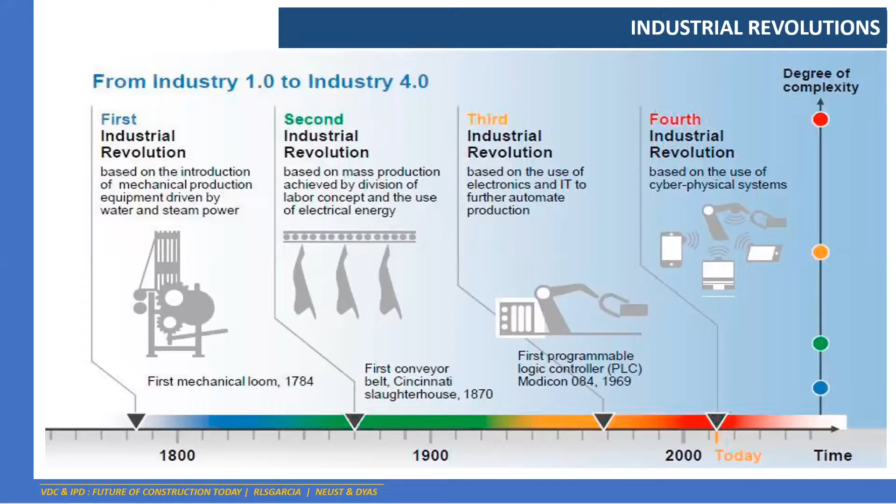Okay, so let's start. The industrial revolutions. Okay, sorry, I was distracted for a bit. Industrial revolutions, from Industry 1.0 to Industry 4.0.

So the first industrial revolution, as we all know, is when the first mechanical loom was invented or introduced, in 1784. It is based on the introduction of mechanical production and equipment driven by steam, or basically heated water.

Then after almost 100 years, the second industrial revolution takes effect. This one is based on mass production achieved by the division of labor concept and the use of electrical energy, so the first conveyor belts. If you notice, the main concept of having these conveyor belts is to strategize the workflow.

Basically more on manufacturing, then later on you will realize there's a connection: the manufacturing processes are being introduced now to be applied in construction using this digitalization.

Okay, and to proceed, we have the third industrial revolution, which is based on the use of electronics and IT to further automate production. This kicks in around 1969, so it's around the 1970s, when the first computers were introduced, and information technology gains traction.

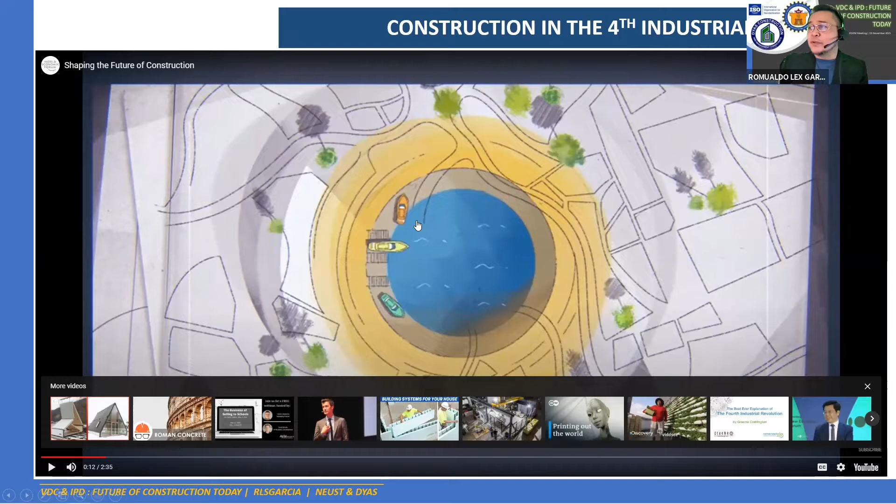So let's take a look at this one. To address these challenges in infrastructure and urban development... could anyone confirm if the audio is audible?

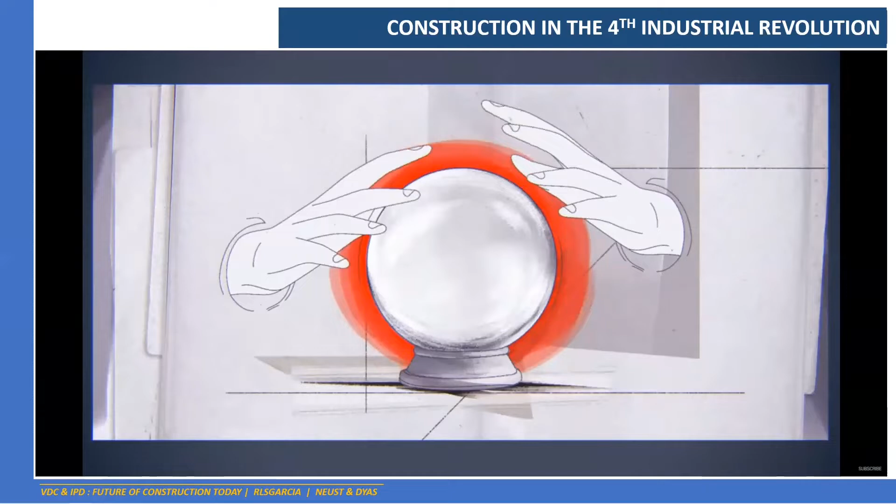Industry, the World Economic Forum established the Shaping the Future of Construction project. But what will the future of the industry look like? How best to prepare for it? The World Economic Forum, in collaboration with the Boston Consulting Group and together with global infrastructure and urban development leaders, developed 3 scenarios of the infrastructure and urban development industry's future.

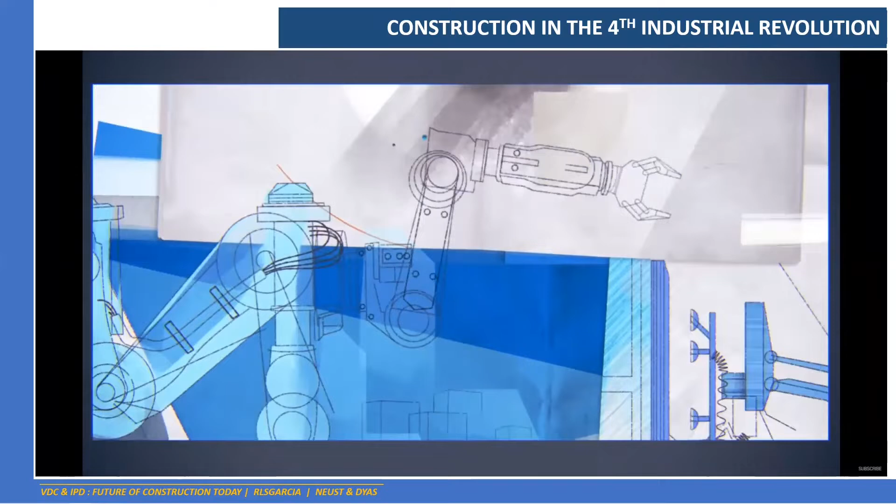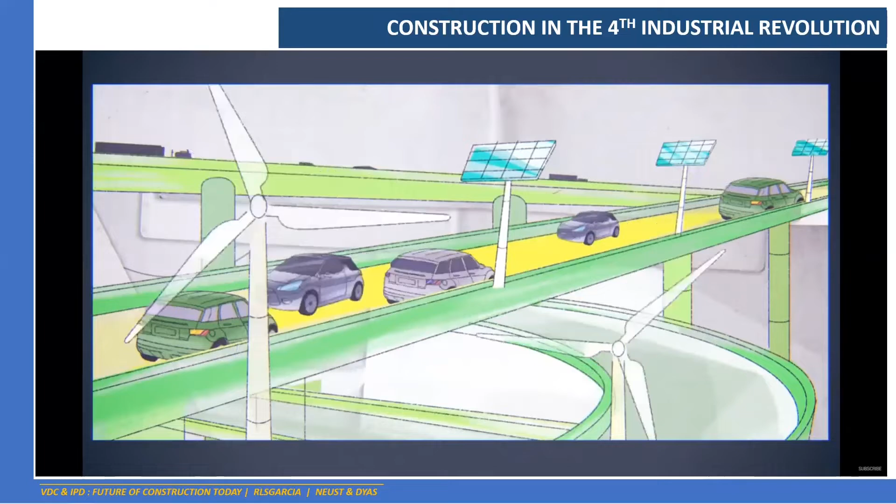One is a world in which virtual reality touches all aspects of life and intelligent systems and robots run the construction industry. Another future could be a factory-dominated society in which prefabrication and modularization are used to create cost-efficient building structures. Or a third scenario: the world will face severe climate change and depleted natural resources, which urge the infrastructure and urban development industry to use earth-friendly construction methods and sustainable materials to rebuild nature.

Current business models, strategies and capabilities of players in the infrastructure and urban development industry will not be sufficient for any of these future worlds. But there are 6 no-regret moves all infrastructure and urban development companies can take to prepare.

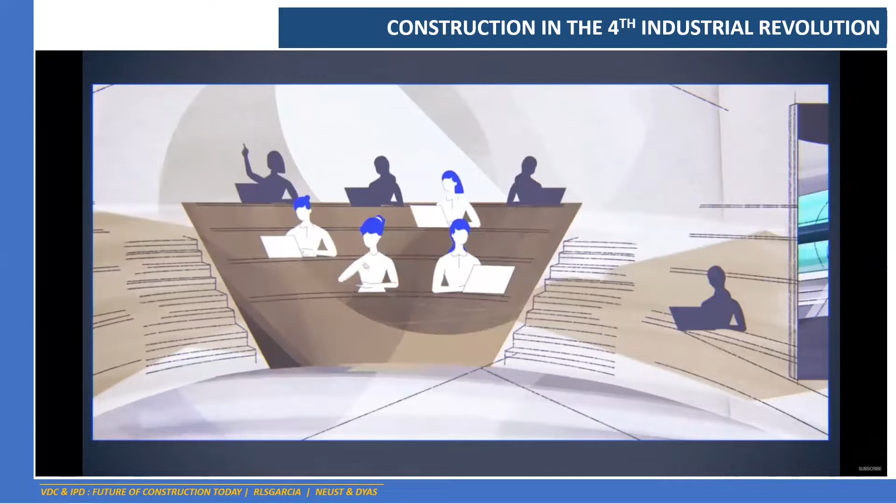First, they must attract new talent and build up the required skills. Widening the sourcing of talent and improving the industry's image can help. The companies should also provide more modern workplaces and opportunities for learning and development.

Second, infrastructure and urban development companies need to enable change management and adaptiveness. This requires agile working methods and flexible organizations. Third, furthermore, they need to implement digital models and data usage throughout their processes.

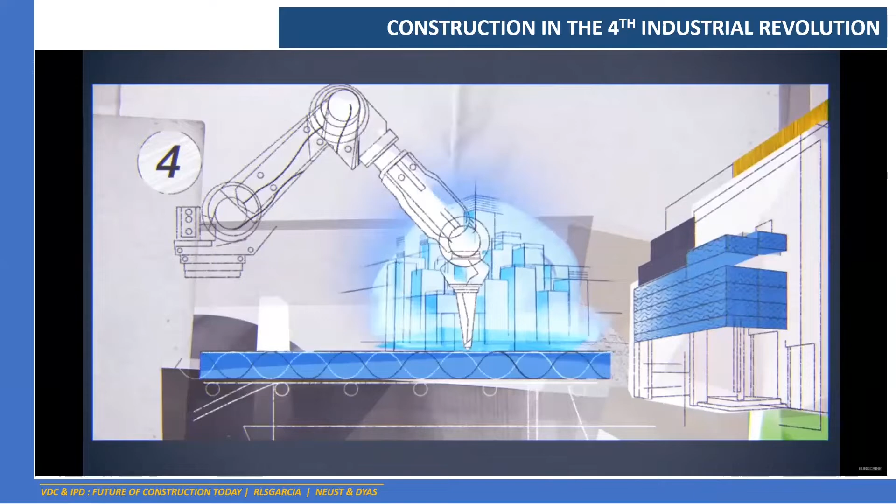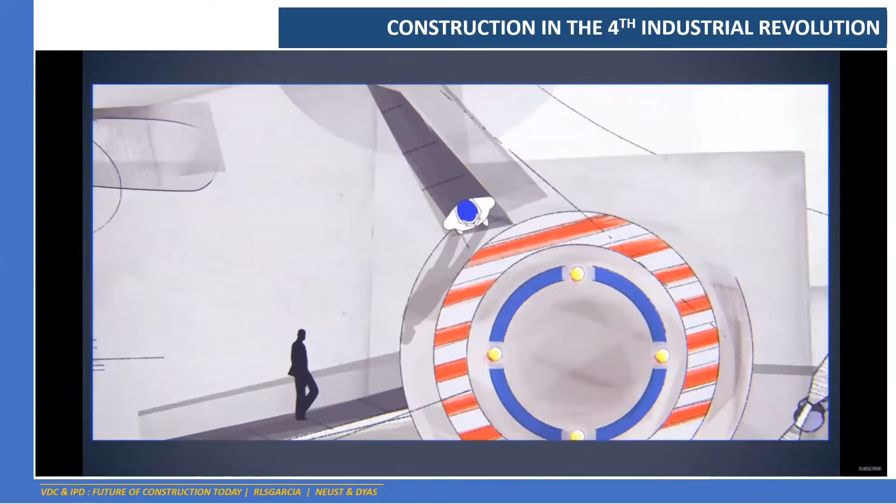Fourth, they must also adopt innovative technologies at scale. It's important to innovate in new ways and integrate new technologies. Fifth, infrastructure and urban development companies need to increase integration and collaboration across the value chain. Sixth, companies must also constantly identify the most promising products and market segments while embracing new businesses.

All right, so this is basically the video prepared by World Economic Forum. A lot of those information, graphs, or tables that I'm going to present later on are coming from the World Economic Forum. They are basically one of the drivers during the fourth industrial revolution to jumpstart what is needed to be prepared.

As we are always saying, unlike other industries, the engineering and construction sector is definitely behind. It has a slow adoption rate compared to other industries such as manufacturing to adopt these new technologies, and has certainly never undergone a major transformation. As a result, productivity has stagnated for over the last 40 years.

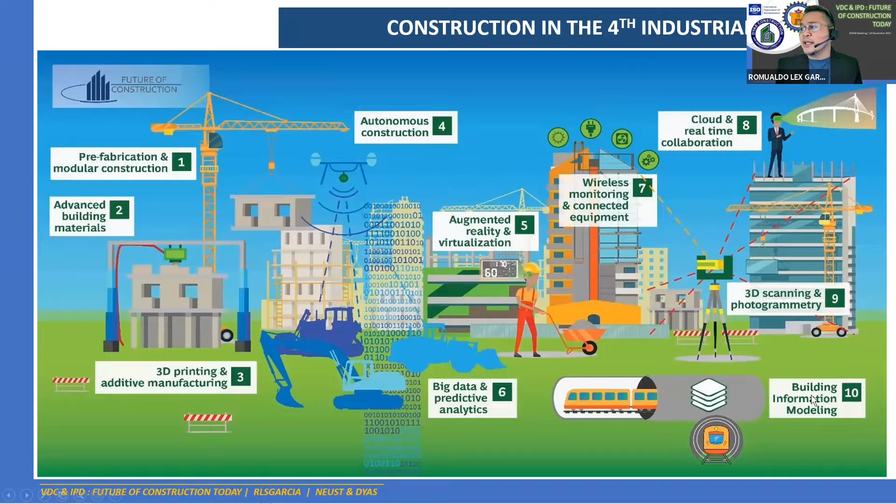Two pieces of those is going to be a distribution line for a major gas or oil company. So for us to test if the connections are good, if the elevations and proper installations are correct, we have utilized photogrammetry, which is photographs and dots post-processed into a 3D model. And lastly, but not least, of course, BIM, the building information modeling. More on this later, so we'll skip this slide.

We have been mentioning the World Economic Forum, and this is one of their main contributors, the Boston Consulting Group. From the white paper they have shared, there are many digital technologies that can be applied along the engineering and construction value chain, from planning, design and engineering, construction, until operations. Some of these are the examples already mentioned.

Big data analytics, simulation, virtual reality using HoloLens or AR, augmented reality, and mobile interfaces. We have AR glasses connected to a tab or our phones, so we can do our 3D review even using just a tab. Even on site, as long as you have internet connection, you can do that. So that's the main concept.

And of course, building information modeling stored in the cloud. And you have ubiquitous tracking, manufacturing, 3D scanning, etc.

With these technology advancements, it is constantly being revolutionized and developed, and these are applicable from the conception, from concept design to detailed design, to the actual construction phase, until the as-built phase and the handover, even to FM, which we call the facility management stage or the built asset.

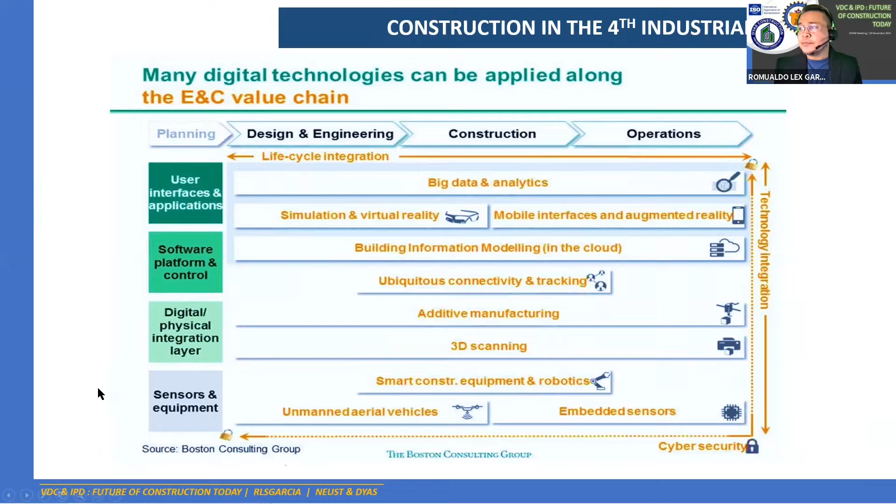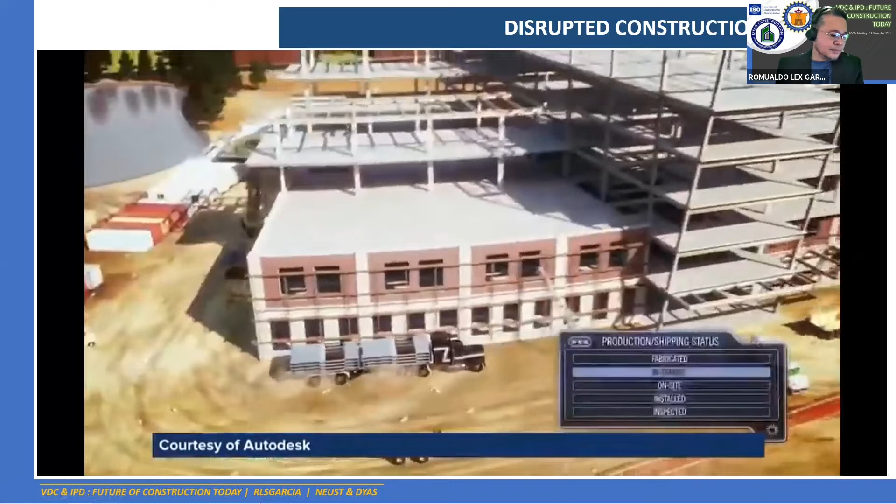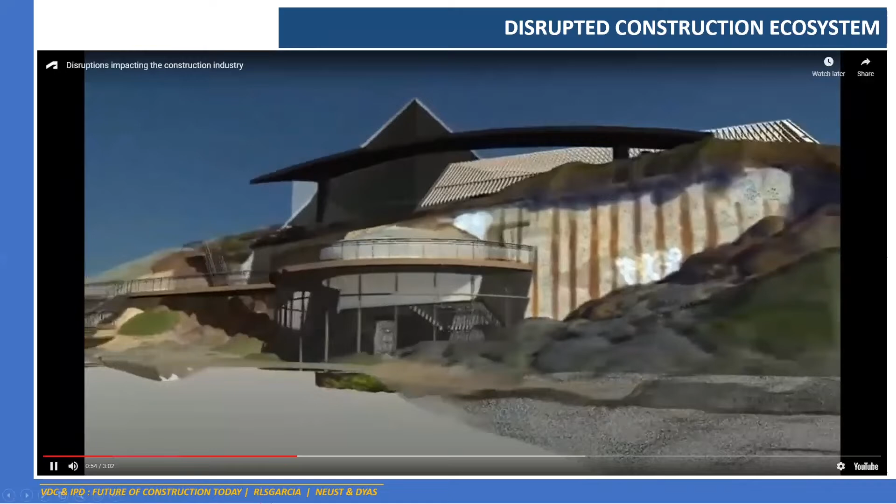The construction industry is changing. The arrival of digital technology is radically altering the way buildings are designed and created. Building information modelling combines innovative technology with more effective business practices, transforming the construction process using intelligent 3D models. It's the first step towards the future of making things, and Autodesk is leading the way. This is the big collision of the digital and the physical worlds - the ability to very easily, simply and cheaply capture reality and bring that into a digital environment, to then work with that digital environment through the use of things like gaming engines to simulate and come up with the best outcome, and then to take that back into the real world through things like augmented technology. Autodesk software de-risks the construction process by outlining and solving challenges pre-build, designing out error and therefore waste.

Hill was an early adopter of BIM. Here, a steep incline was factored in at the planning stage. With BIM, you can spin buildings around, you can turn them upside down, and you can then understand in ways we never could how buildings will be going together. And in an increasingly globalised industry, BIM technology allows companies to become more competitive, putting all the relevant build information in one place, liberating site managers. It allows us to bring our office out onto site with us, so it frees up a lot more of our time. You know, years ago we'd spend 90% of our time out on site.

10 years ago that started reducing until we're probably spending 30% of our time out on site. This gives us back a fair chunk of that back out on site again. You've got a lot more control of what's going on, you know what's going on more day to day, and you've got a lot more control over the details that we've been put in.

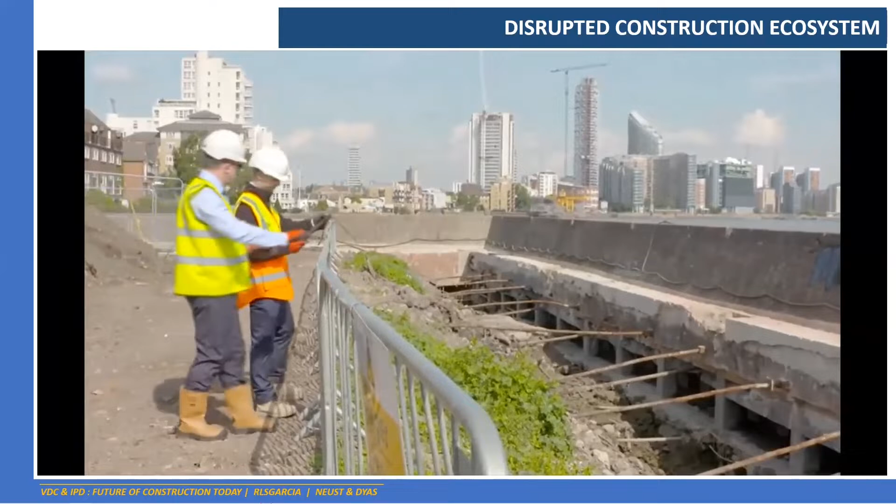Autodesk is harnessing two major new arrivals in the field: the cloud, which is putting project information and application functionality into the hands of the construction workforce, supporting them with vast amounts of computing power, and generative design, the use of algorithms to accelerate the design of projects.

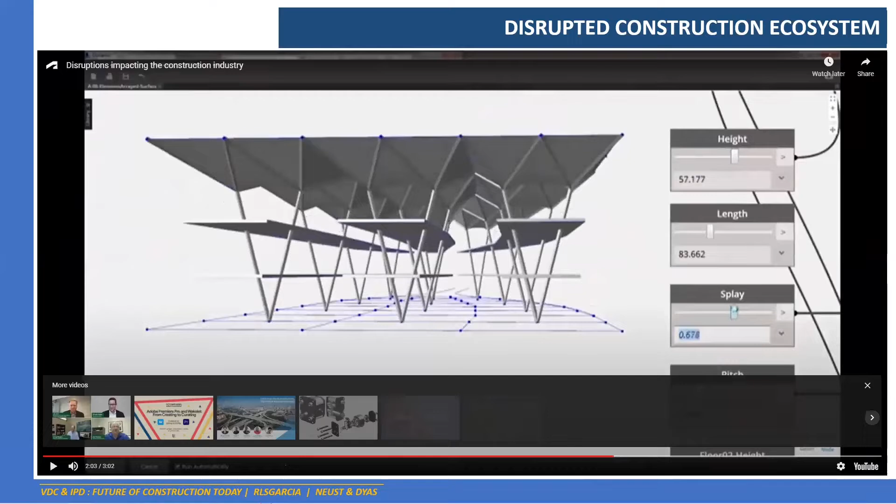Okay, so we're about to transition to the next part of the lecture, which is construction industry as a disrupted ecosystem.

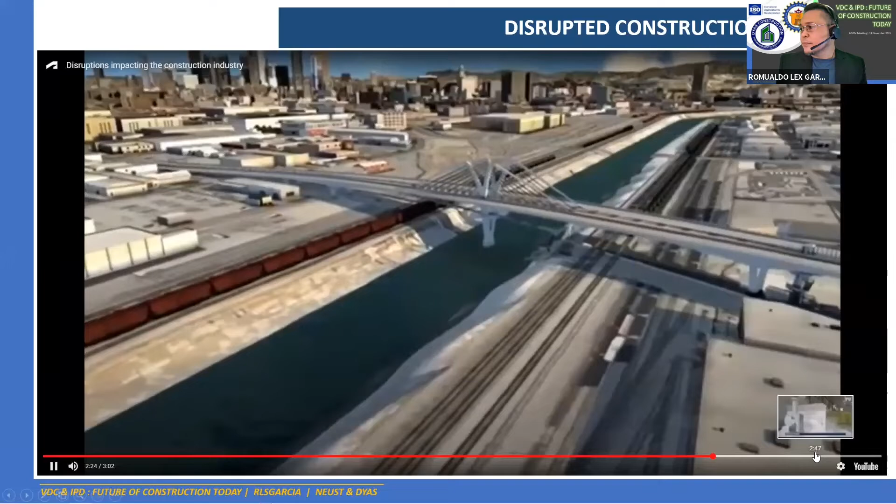Computing power essentially pursues the best possible outcome because you have access to huge numbers of resources. And robotic manufacturing holds the promise of radically shortening the distance between a design and...

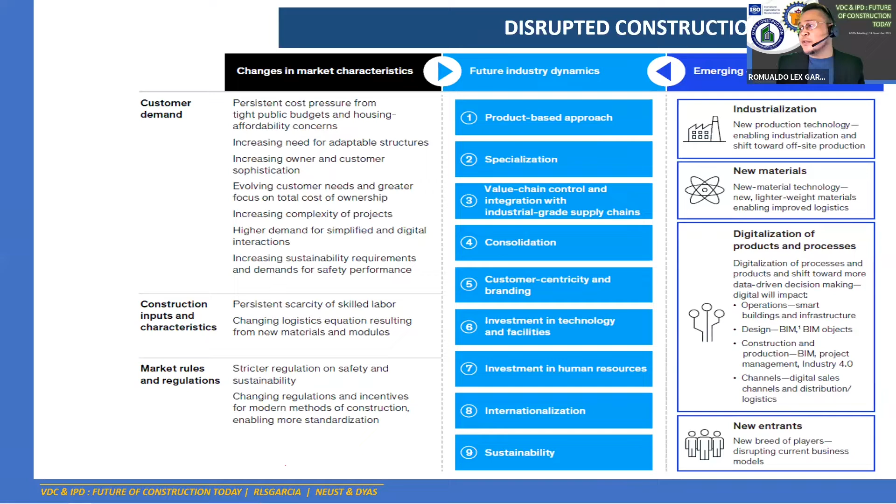Again, these are the sources of the construction disruptions. This is from the paper by McKinsey and Company. They have the rising customer sophistication, scarcity of labor, safety and sustainability, industrialization. These are the sources we had explained earlier, the new sources of disruptions in the industry.

Also, because of new technologies and persistent scarcity of skilled labor and changing logistics equation, skilled labor shortages have become a major issue in several markets.

And of course, those who don't transfer their knowledge will eventually retire. So that is one of the practices we are trying to do, transfer of knowledge from the generation already practicing it to the younger ones. Once they get a better grasp of it and are able to innovate, we have a huge chance of being successful in the next industrial revolution with these new ideas. It's still rooting there. The older staff knows a lot, but if it is not transferred within an organization, it is really detrimental to the fall of that company.

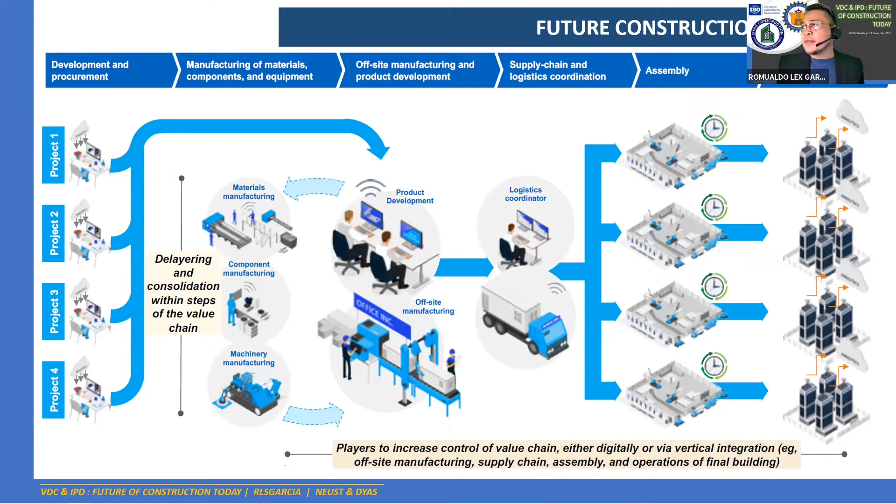Alright, so everything good so far? We're already midway with our presentation. So let me introduce the virtual design and construction processes. I hope that information is clear. We're just emphasizing there's really a need to digitalize these processes and streamline them using the available technology and innovations that we have.

Now let me reintroduce BIM to you guys. So what is BIM? It is Building Information Modeling. It is an intelligent 3D model base. Intelligence, take note, it is not only for picture, not only for visual, but you have a lot of built-in information within those objects in your 3D model, or elements, with corresponding attributes and parameters. These are model-based processes that give key engineering and construction professionals, or the AEC as we call it, the insight and tools to more efficiently plan, design, construct, and manage buildings and infrastructure.

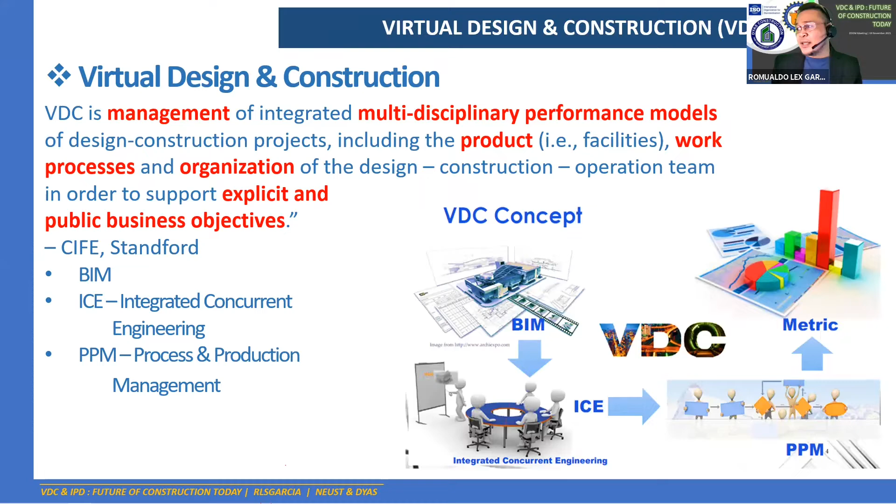Basically, the attendees of the ICE meeting are the major stakeholders or major decision makers—the PM, the design manager, the discipline leads who can say yes we will move, or no we can't. Because the main purpose again of the meeting is to resolve the issue. Okay, we sit in, take a look at the model, identify the issues we're facing, and right there and then we should be able to resolve them. A lot of companies are doing that, especially the big companies doing huge projects.

So this one, if you're able to see a document from BCA, the Building and Construction Authority in Singapore, this is from the VDC guide actually. It simply shows here that we have project goals, and for us to be more efficient, we will utilize ICE, we will utilize BIM, and we will utilize PPM, or the Process and Production Management. So these are the targets from the Singapore VDC guide. We have BIM—it could be the product, the content, and the quality are really checked. These are the information embedded in each model to fulfill that specific target.

We will not go into detail on this one, but you will definitely have in the actual project the level of detail. This is basically one we are trying to resolve or have inside our models.

Then also the ecosystem, which includes the stakeholders, the environment, the network, and process optimization. Normally, when we do VDC trainings, it's more about setting our mindset that we have technologies available, but we also have our traditional processes. Now, if you as the leader of that company or organization, what can you do to streamline this? What can you do to utilize available technology in the market? A lot of companies are doing R&D on it, and you can simply adapt.

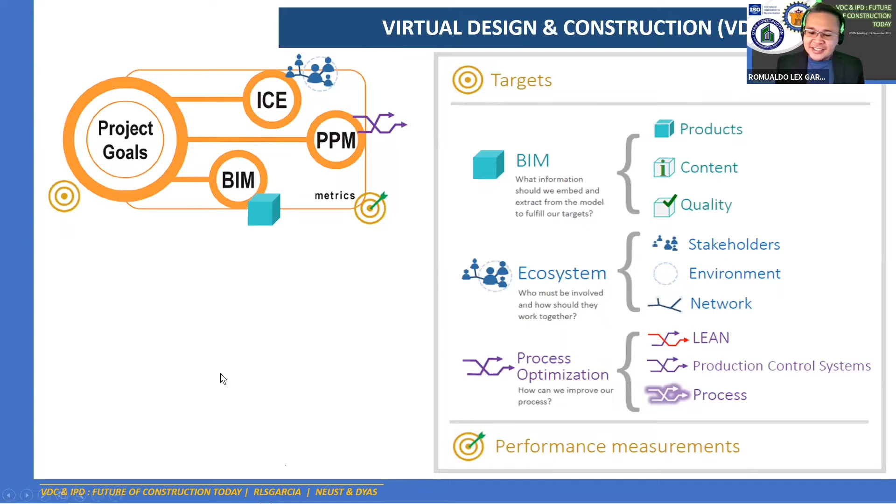Isn't it amazing? Okay, I think we're going to transition to the last part of our presentation.

I'm going to show some examples of BIM and VDC applications in all construction project phases. We do have applications from conception or basic design, to detailed design, to as-built construction, until handover and operations, or FM, facilities management.

One of these BIM VDC applications is, of course, reality capture. You have your camera, you can have smooth communication, comparison, etc. Basically you have a camera and you're utilizing it to capture your actual project. This is very useful for starting renovation projects or alteration projects, or for as-built documentation.

I think this is a video, yeah, one example of laser scanning and scan to BIM. You scan using reality capture equipment and eventually post-process it into a 3D model that you can utilize also in your 3D workflow.

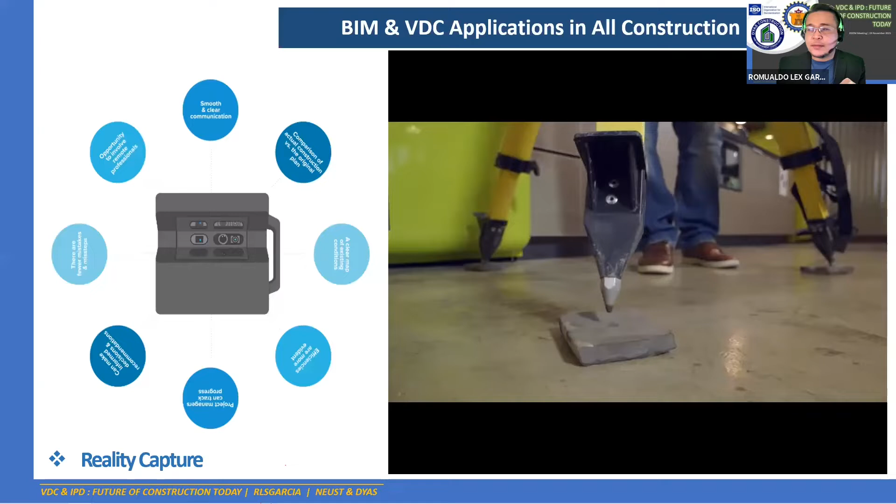The device basically shoots the laser at the target and then captures the data in return. It scans a vertical line and then pivots a small degree and scans the next vertical points. The points are registered, and we can register the points to a survey grid.

I'm going to fast track this one because we still have the IPD to cover, and I want to cover that because it's quite unique and still new even in the Singapore context. So I will fast forward this.

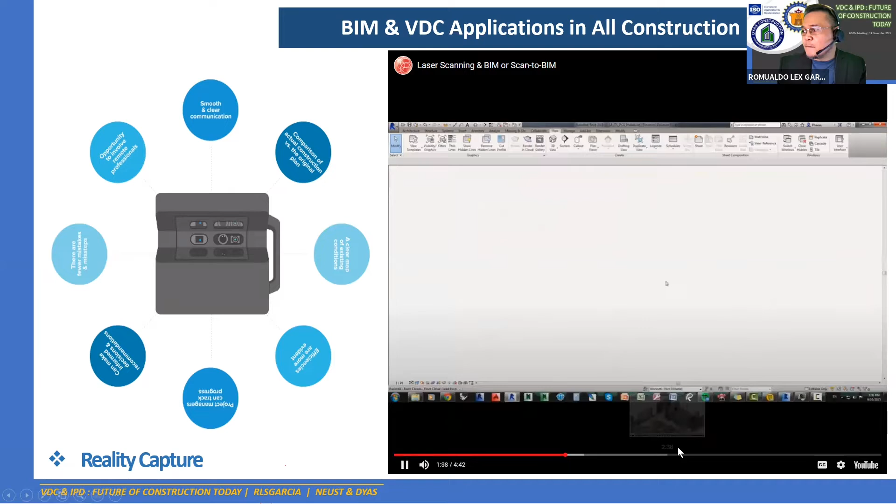3D BIM models that we can use for floor plan drawings, elevation drawings. We can cut sections through the point cloud, so we can actually generate traditional documents very, very quickly, and know their actual representation of the actual space.

From a design perspective, we can design a new system inside that point cloud. So we can put a new ceiling into a space, maybe it's a retail space. We can put in new shop fronts and see what they look like in an accurate survey. Then we can figure out, okay, if we demolish these rooms, we can refit them this way, so we know the new systems would fit inside the old system.

We can get very, very detailed, capture the survey information, and then a couple of weeks later somebody says, actually we need a measurement for the internal wall system. We don't have to go back to site and survey again, we've already got all the points, so we can just go back and remeasure the scan for that. It's essentially a very, very powerful survey tool.

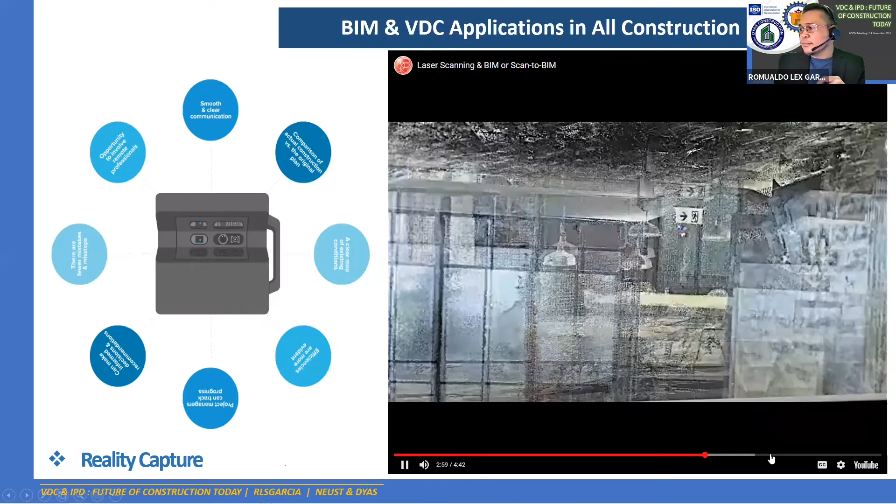But you may want to use the data for something else, like facility management. So you've got your building and you don't have a BIM system. You could actually survey the facility, capture all the as-built information of a space that they already own or that they're planning to purchase or invest in. That's where it gets very, very interesting. It's clear that the 3D point cloud data produced by high definition scanning will save time.

Okay, so this is our HD laser scanning. We have a lot of that in, I think even the Philippines, we're applying that. We do have several companies who offer rental so that we can apply the reality capture or the scanning.

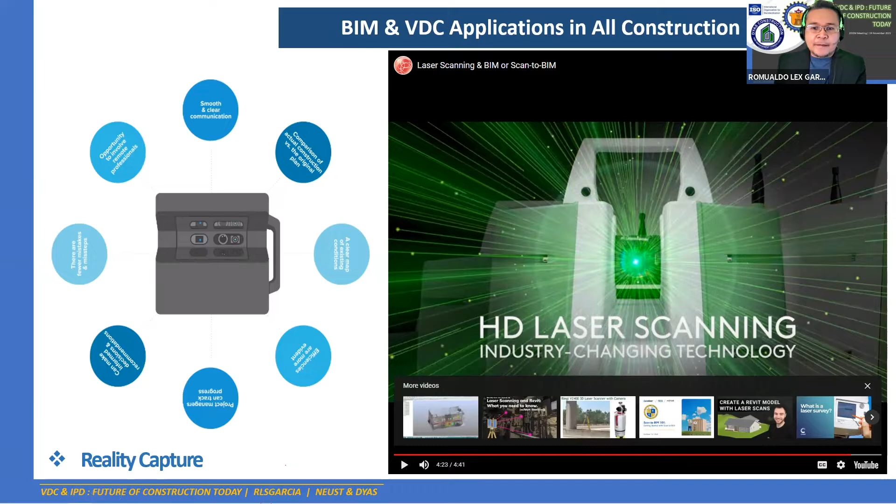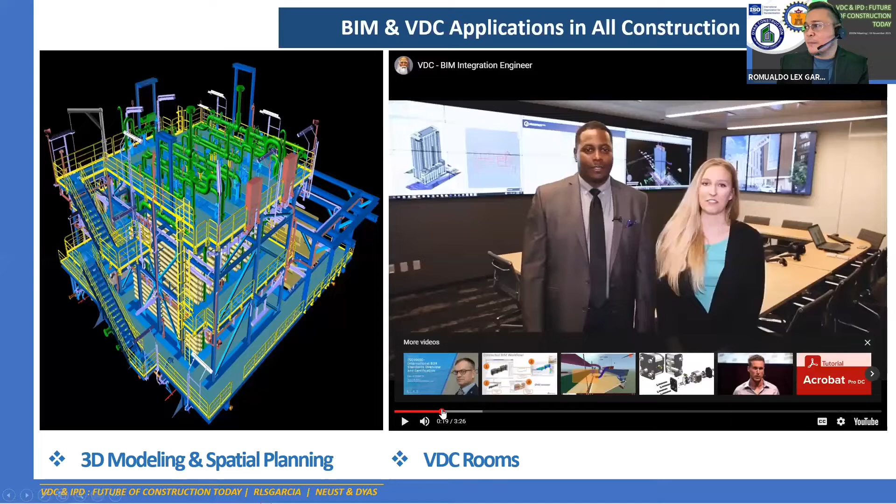Features: as you can see, this room is outfitted with multiple screens for presenting and collaborating information, virtual reality cameras, audio and visual sensors, and other interactive elements that can bring your presentation to life.

The immersion room also comes with a variety of connection options. Multiple HDMI cables and ports are available for employees and guests to use to present their screens. The room also has Wi-Fi capabilities to allow presenters to connect remotely using their iPad, tablets, and mobile phones.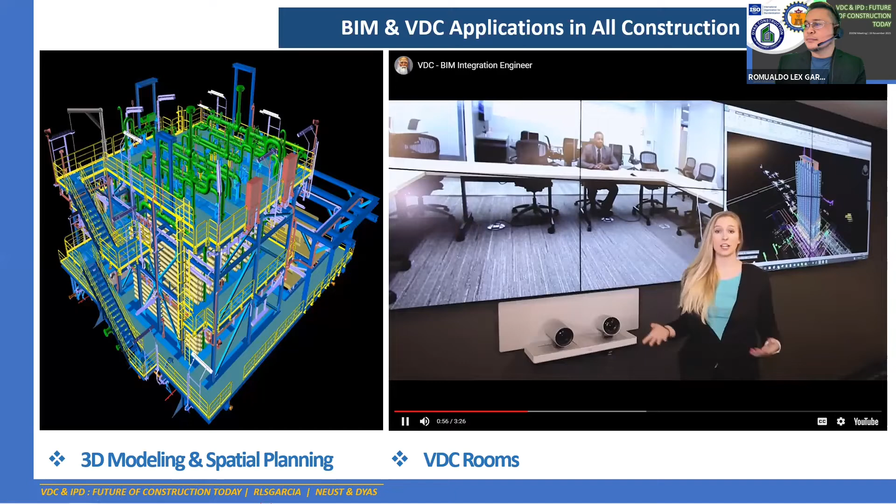The room makes use of the Cisco video conferencing system, which provides a clear live stream of the presenters and participants and can even jump from speaker to speaker. Sensors and microphones positioned throughout the ceiling tiles follow my voice and motion, allowing the camera to follow me around the room.

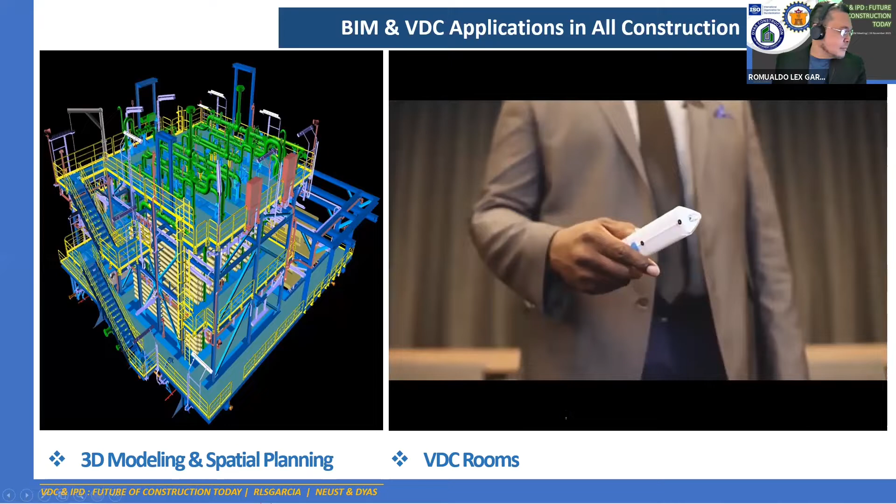The immersion room uses mezzanine and oblong technology controlled by these wands. The wand can be used to move, discard, and even zoom into an image presented on the screen. Images can be locked onto one screen or split across all three, depending on the needs of the day. This allows presenters and participants to get into the nitty-gritty details of a project.

We're now going to show you how Lendlease is using these technologies and get a deeper dive into the design and build process. At Lendlease, we like to say that we build the project 4 times: 3 times through technology and 1 time in real life, to take an architect's 2D drawing and convert it into a 3D model.

We can use this model to identify basic clashes in mechanical, electrical, plumbing, and fire protection systems, and get a basic layout of the building.

We now jump to the Navis model, which allows us to see the inside of the building and further identify any problem areas that might come about in a typical project. Again, identifying any clashes or collision sites in this phase can save a lot of headache later on in the process. Additionally, it allows you to get a feel for the space before reaching a point of no return.

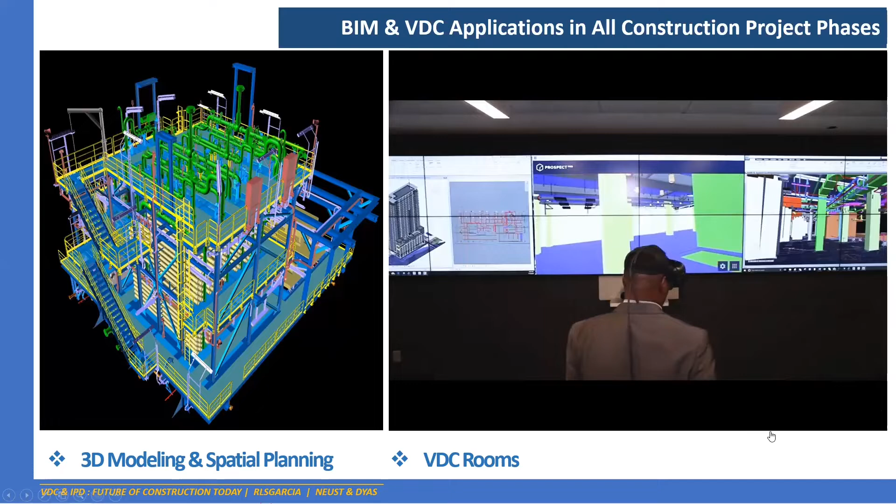The last 2 examples are industry related. Utilizing VR technology, we are able to move inside the building and get an up-close and personal look at the building's interior. I can insert myself directly into the interior of this building and identify potential issues on a new level. This has been particularly useful for detecting safety hazards and identifying space restrictions. Again, identifying these problems ahead of time can save the project team time, money, and keep our construction team safer.

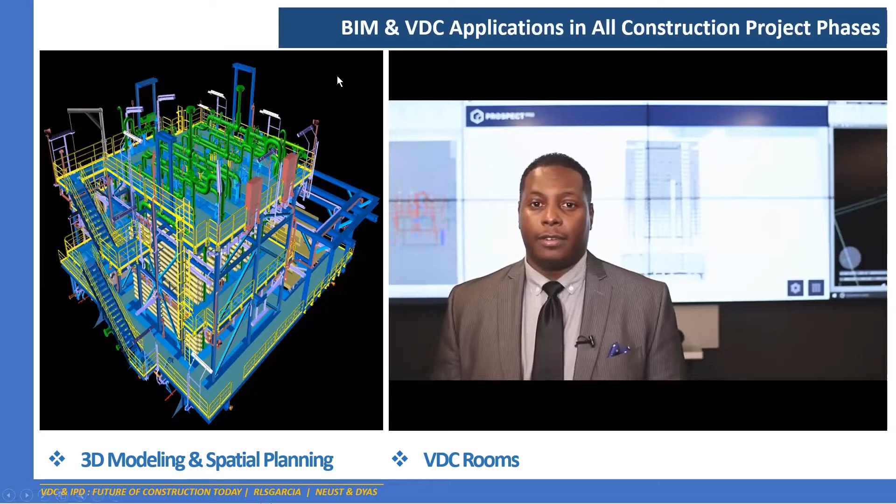These are just a few of the cutting-edge technologies. Thank you.

Okay, so that is an example of a VDC room wherein they're doing their model reviews, and it can be utilized as well for the one that I mentioned, the ICE, or the integrated concurrent engineering.

Next, another 2 of the examples, of course, of the VDC and BIM. We have the 4D simulation. 4D is basically utilizing the 3D model and connecting it with our schedule software such as Primavera P6, or even our project management tools, even Excel.

So let's see the video. This video is one of the newest software that we have in the market, which is the Fuzor 4D simulation, a Chinese software.

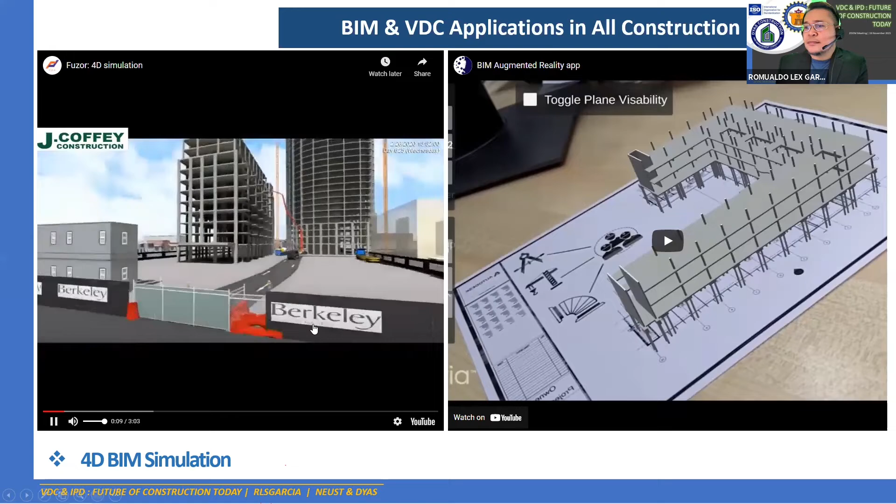So this is one example. They do have their 3D model, even the site cranes, and it is connected in their planning. Later on, we're going to see some of their schedulings connected here.

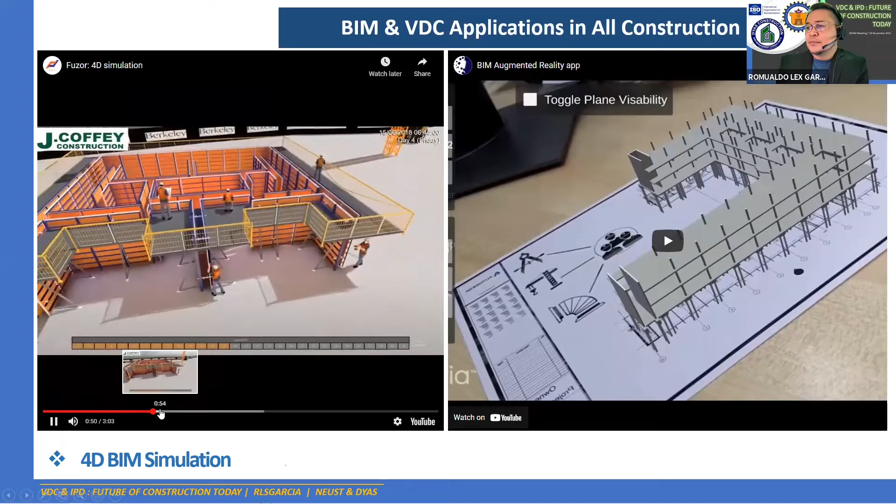Based on the planning, you can do the simulation, like the sequence of installation. This is a typical installation of a barracks for the crew. You have their calendars underneath here, and you also have the 3D models of the trucks. So doing the second level based on your schedule, starting with the outer part of the building, you have the initial facades.

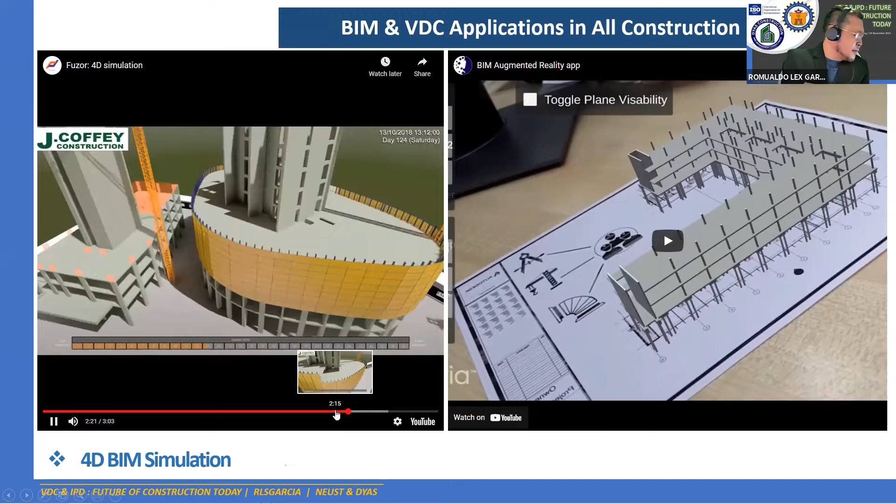And that's it. This is one example of a 4D simulation software.

We do have also the Autodesk Navisworks. We also have the Bentley product, which is Synchro Pro, which is a very robust software. Here in Singapore, we do have separation of projects. One project would be using Bentley enterprise design tools for collaboration, for their common data environment, and other projects would be utilizing the Autodesk products. This is one of the newer products in the market, which is the Fuzor.

Next, we do have also the augmented reality, wherein you have a paper and you can see it growing into 3D.

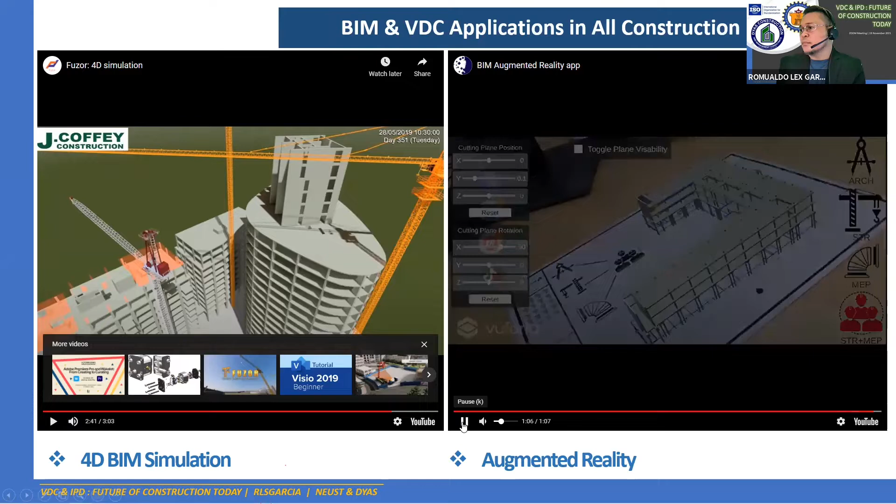Okay, so actually a lot of companies are really racing to do the innovative stuff for the AEC industry, or the architectural engineering construction industry. Trimble, which is the maker of Tekla, also has their own version of this virtual reality or augmented reality.

If you have seen old movies or cartoons wherein you have a screen and you're just pointing using your hands, hand gestures to zoom in, zoom out, slash this file, etc., they're doing that already, and you can see it in a phone. I just wasn't able to get a copy from a friend working in Trimble. Hopefully I can share it with you, Sergio Phil.

Okay, moving forward, I think we're on top of the hour. We're going to transition now to the last topic, which is the integrated project or integrated digital project delivery, IPD or IDD here in Singapore. So to start with, let me give you a 1-minute video.

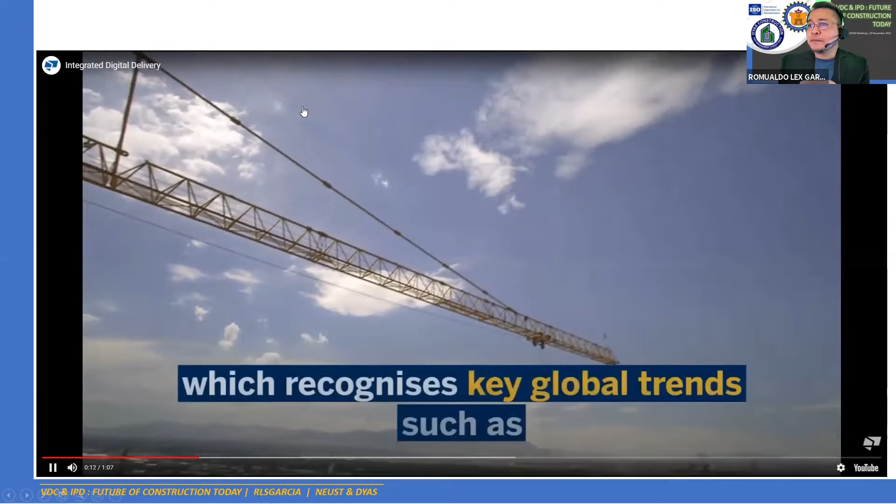I hope it's okay, so it doesn't have the sounds. Too bad. So this is the IDD product by Trimble.

The digital revolution and rapid urbanization. It identifies the key transformation of the key areas is the IDD. So what is it? And why should we care actually if we are part of the construction industry?

So more of this stuff on the succeeding slides. Basically, we have the technology first in BIM, and we can apply it on site, so we've coined the VDC, what is its applicability, and eventually we focus on these four. Some of these are also mentioned, like the drone. Later on, you will have a differentiation on this. What I'm going to share is the IDD initiative of BCA here in Singapore.

So this is the Integrated Digital Delivery, or IDD. It is the technical guide of how the IDD is implemented. What they're saying is it is integrating and digitalizing the built environment value chain. So we have the streamlining of work processes, connecting stakeholders, digital data, innovation, and technology.

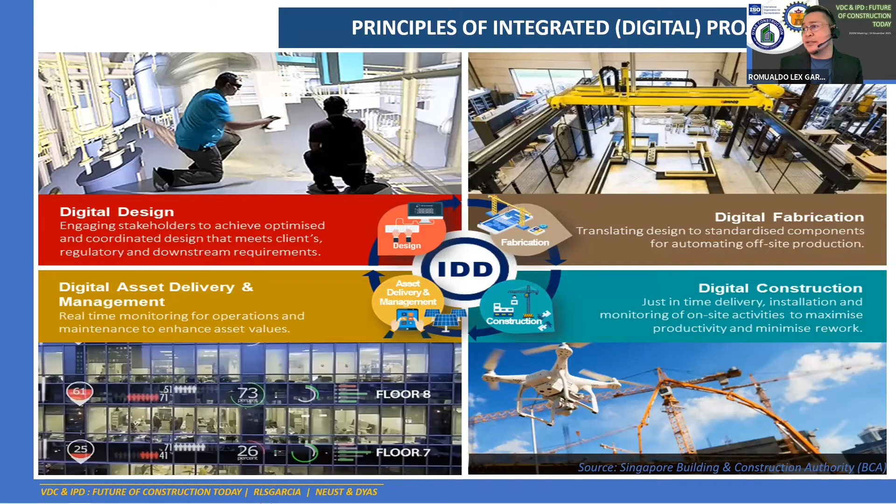So these are just some of the examples of the IDD initiative, some of the use cases. What does it mean? These are the value chains that we have: design, fabrication, construction, and facilities management. These are the usual use cases that we do have for study, for further improvements, or for existing innovations.

Like generative design, wherein from your model you can have automation, like you can do 1 to 1,000 iterations using a specific software, like for example Dynamo. You could link that in your 3D modeling tool like Revit, and once you run the script, it is more like programming, but it's like connecting the nodes, and you can have as much as multi-thousands of iterations or modifications in your model.

So this is quite useful during the concept stage. With this, you can also utilize it like, okay, this part is quite windy, what if I move this a bit? So you don't have to redraw anything, just run the script and it will give you options. It is more of automation from your 3D model.

And the design optimization, of course, using your 3D model with the correct info, you can optimize it until the FM stage. Of course, we also have the design analysis and simulations. We can run the finite element analysis and connect it.

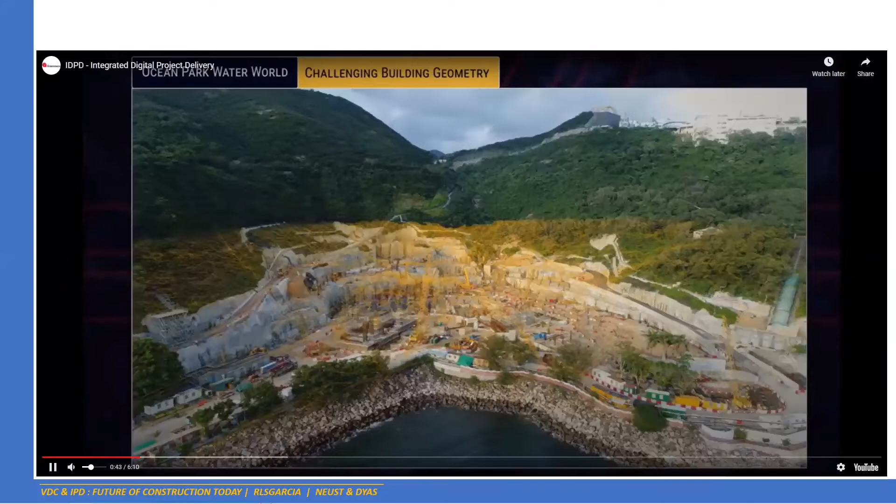Gammon is one of the companies here in Singapore and worldwide, and they are one of the strong implementers of BIM nowadays, especially this IDD. So this is one of their promotional videos. They have a lot of spectacular projects that we can relate to, and it's really amazing how they adopt the technology.

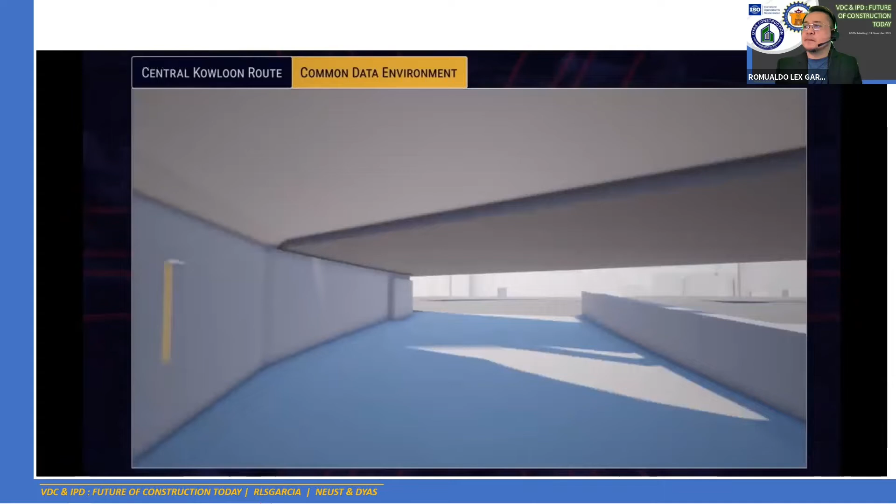So the project is underground, and they're utilizing Synchro 4D for their planning. Inspection using the VR inside a VDC room or the BIM room. In some offices, they call this the BIM cave.

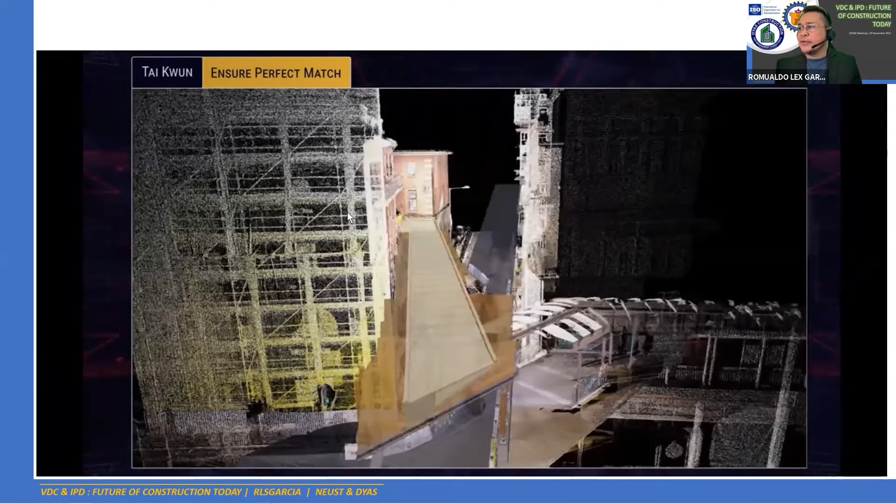So this project is in Hong Kong. They have several projects there that utilize massively the digitalization, BIM and VDC. This is what we call the point cloud, the photogrammetry. So what you capture are dots, but you eventually post-process it, which you can transform into a 3D model.

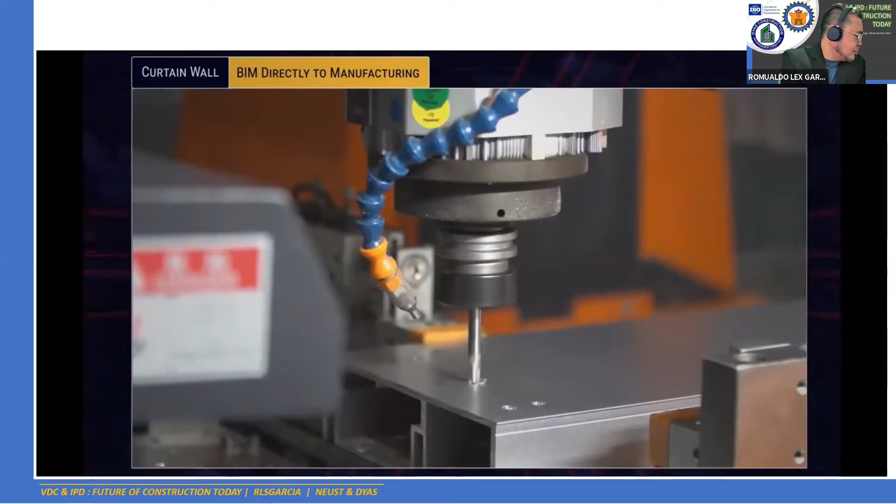So some of the fabrication yards or fabrication workshops are abroad or overseas, and they will be transferred via a tanker or a seagoing vessel. And yeah, this is normally, here in Singapore, it's nighttime where we do the transport.

I hope you can spare me a few more minutes to finish this. This is a very good video where we can relate to the majority of the digitalization and VDC project applications. So again, during nighttime is the lifting and the installation.

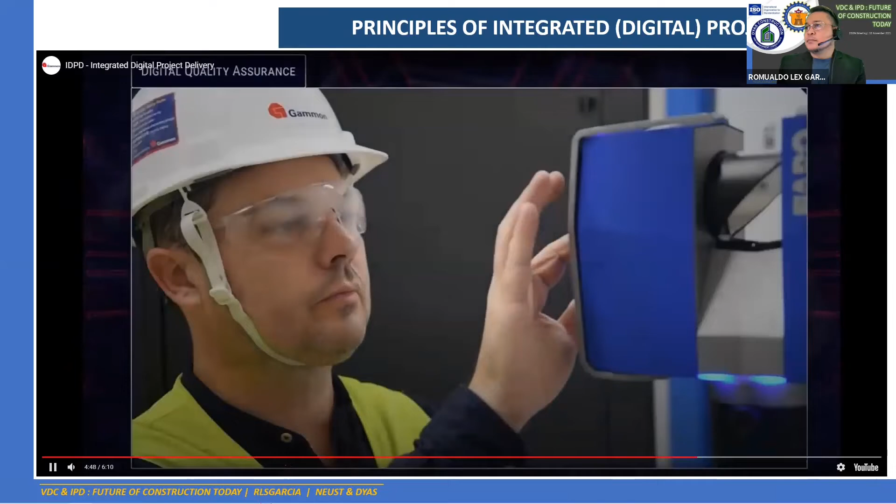Before they officially hand it over, we do have the LiDAR scanning. This is one of the products that offers it, Faro. We are comparing the data inside the model that we have created, then we post-process if there's no difference. If there's any, we need to capture that in our reports to be approved for handover.

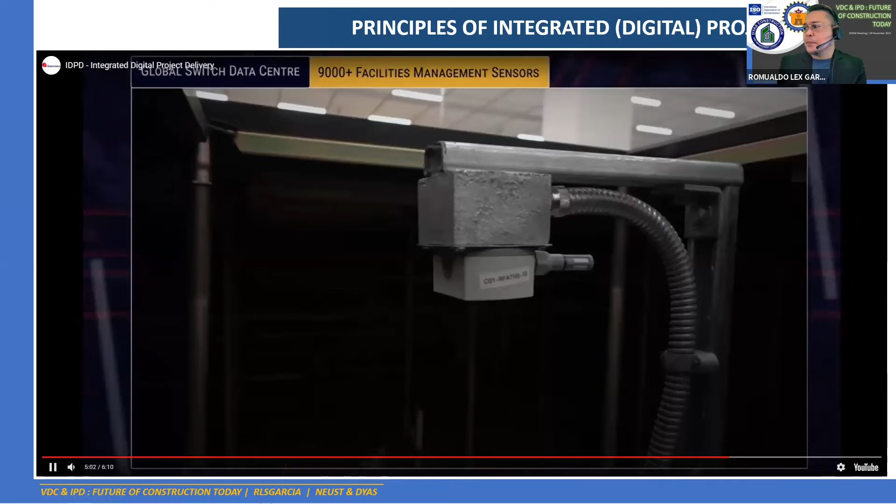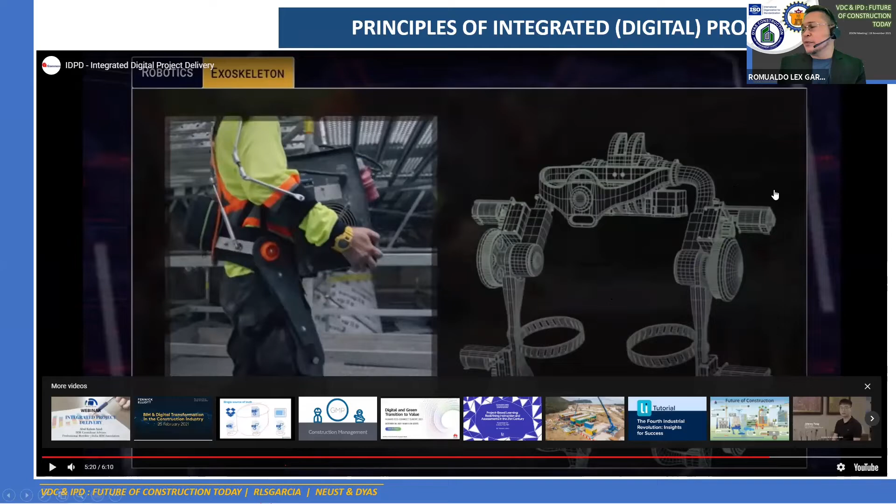This is one of the partial robotics, wherein it is a wearable vest to help the site workers for heavy liftings.

Let me go back a bit. So they utilize a 3D model for their site walk and safety inductions. This one is the safety induction on site - it shows the actual site locations of the barricades, location of the cranes, so they can do the briefing almost in real time.

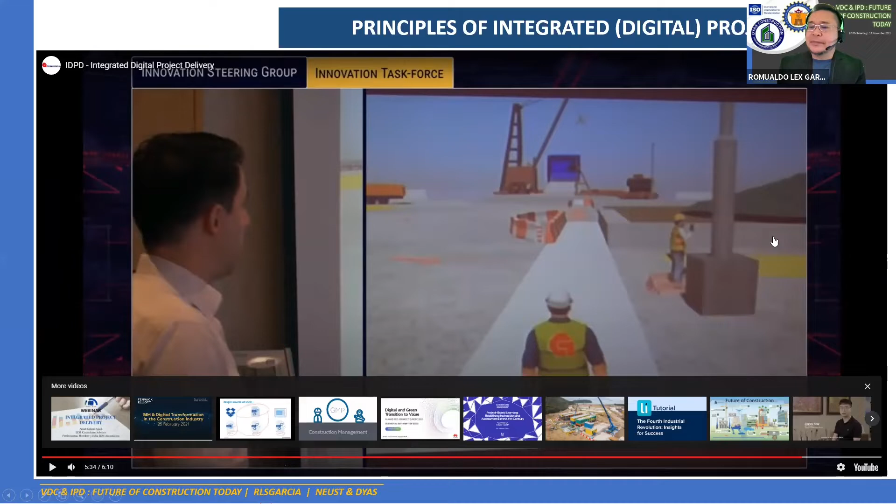So this is Gammon. I do have one more video, but I think we can wrap this up here.

This is from Ong and Ong. Ong and Ong is also one of the pioneer adopters of BIM in Singapore. Let's see how long is this video - otherwise we'll just end it here so we can still have a few questions. Sir Jofil, is it okay? Four minutes. Yes sir, proceed, okay sige sir. Four minutes.

So Ong and Ong is one of the pioneer adopters of BIM in Singapore, and now they are partnering with the BCA, or the Building and Construction Authority, to be the pioneering adopters of IDD as well.

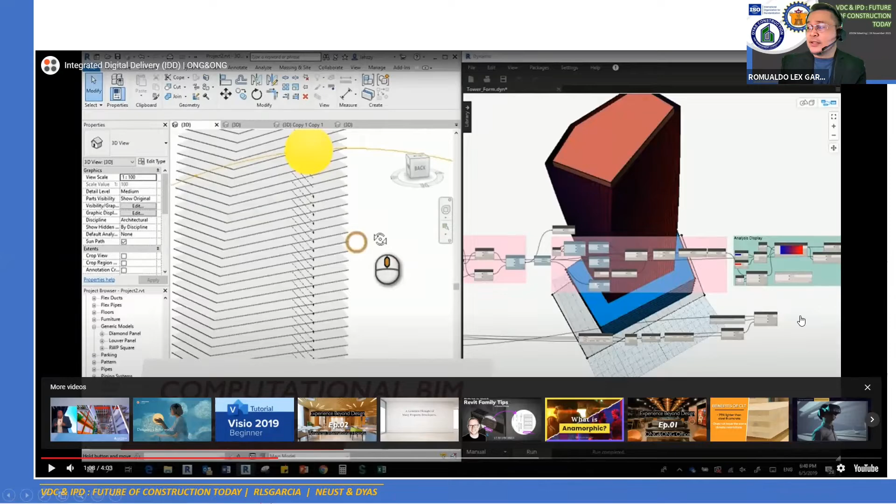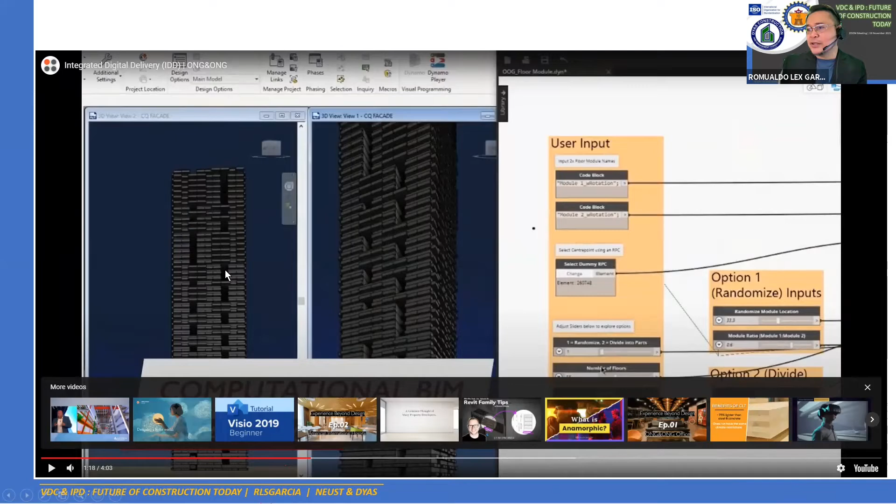We call this computational BIM, or generative design. You see, the openings are moving based on the conditions that you want to test. Later on, when you're going to present it to your client, you're going to have several options. Notice here, the openings are the ones being automated.

So this is another example: a twisted one, a straight one, a longer one, a long rectangular shape. These are just some of the modifications - it is automatically done if you have a base model.

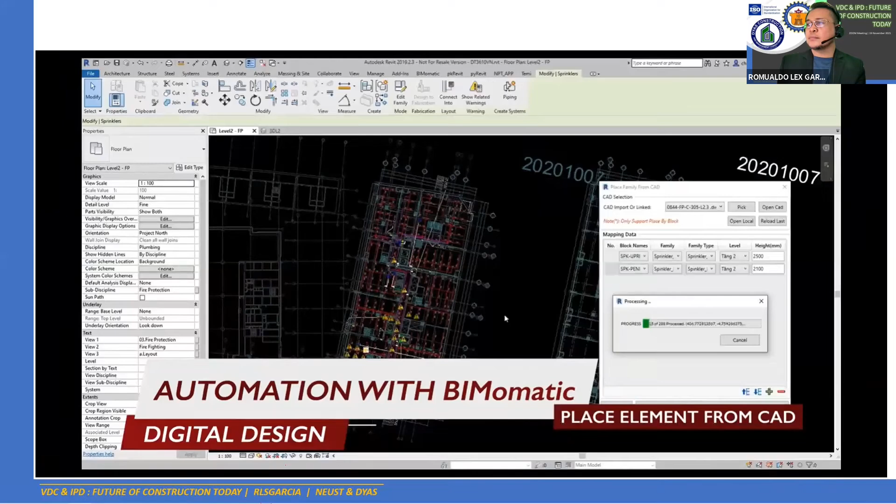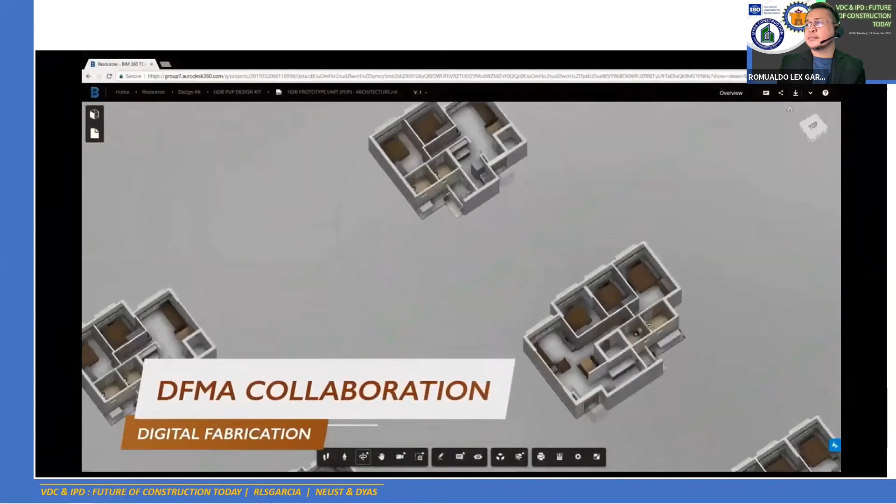Okay, the prototyping. These are per unit - so again this is part of the DFMA, and they're going to install this on site, stack it up stage by sequence that they have planned out.

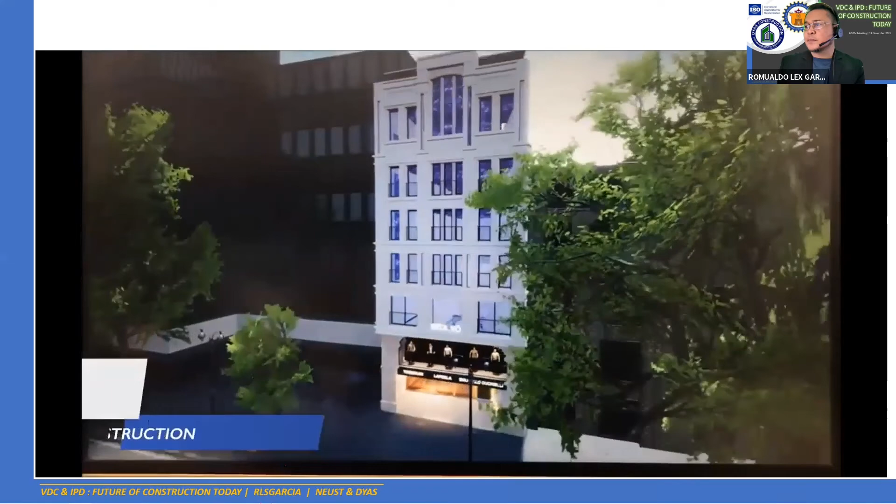And lastly, for the FM, facilities management, we have this scan to BIM. Your actual output or product is being totally scanned and converted into a post-processed 3D model, and you can do the virtual walkthrough before handover.

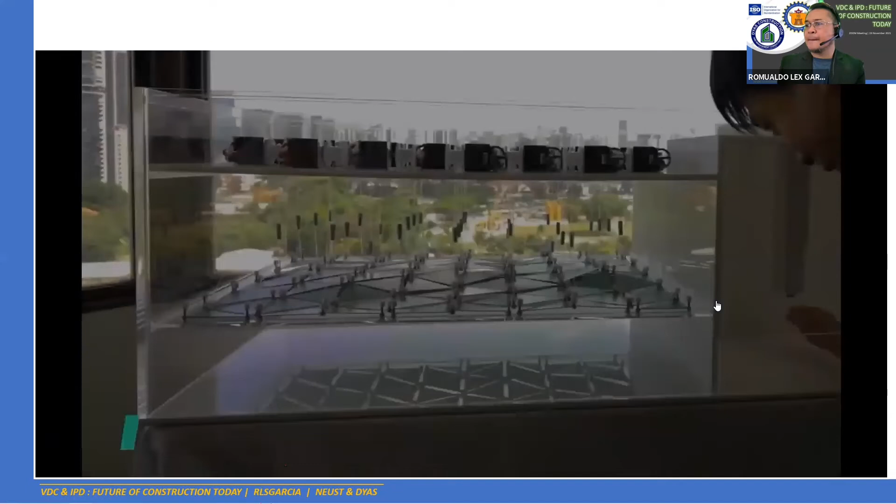So these are the things that they are preparing. Again, they are one of the pioneers here - the ISO 19650 certification, which is quite expensive actually. This is, if you're really serious in studying or applying BIM digitalization in your company or in your practice, one of the certifications that we should aim for.

Then they have their own training center and innovations. They do have merits or additional incentives for R&D works or ideas.

All right, I think this is the last of my slides. Thank you so much for your attention, everyone. I hope you pick up something, and I think it's time for some few questions and answers.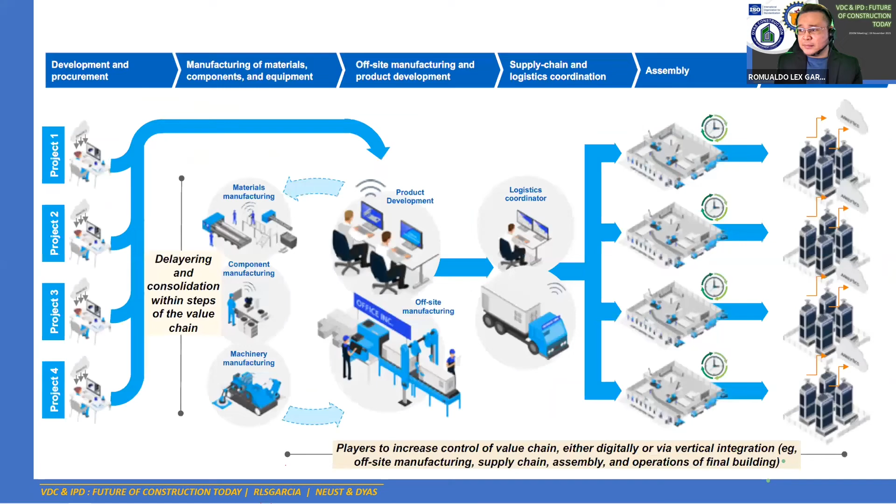But definitely the risk is more on if you're just buying it, but you're not doing explorations, you're not doing further studies to fully utilize this. So that's not a good practice if you're trying to invest on something. So that's part of the risk, Sir Jojo.

Money-wise, actually, okay. I think there's a question in the chat box. Sir Jet.

Sorry, I muted. Okay, so this question is from Sir Jojo. So you mentioned earlier regarding passing of skills to the new generation. Then we introduce robotic machinery, what will happen to those skilled workers?